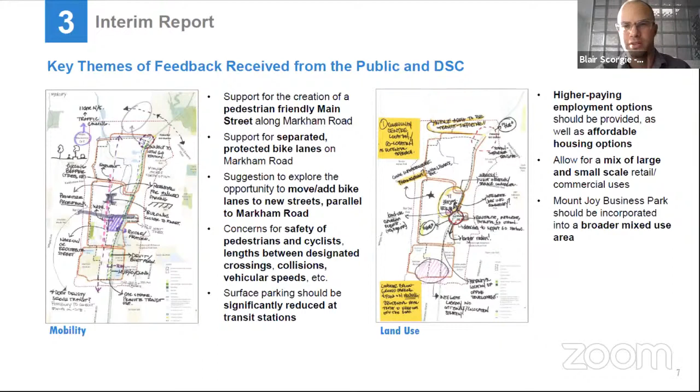You can see the images here of that. Those themes are transportation and mobility, Mount Joy Creek, parks and open spaces, the environment, infrastructure, community services, employment, retail, housing, and finally placemaking. This is just a summation of some of the other material.

So with that, I will hand it over to Lily quickly, who's going to take us through a fly-through demonstration of the plan.

Good evening, everyone. Blair, could you just stop sharing so I can... thank you. Give me one moment to get set up here.

Okay, thank you, Blair. Good evening, everyone. I am pleased on behalf of the staff and consultant teams to present a fly-through of the 3D model of the draft demonstration plan for the Markham Road Mount Joy secondary plan area. The 3D model was prepared using InfraWorks software and is intended to help visualize the draft demonstration plan, which contemplates the secondary plan area at build-out.

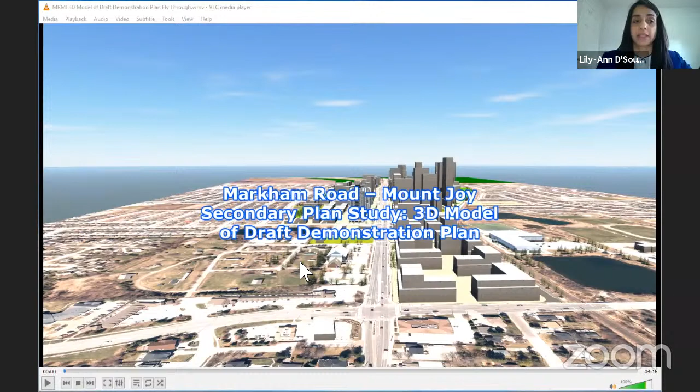As a reminder, the draft demonstration plan is a work in progress and will be refined by staff and the consultant team following consultations with stakeholders and the public, as well as transportation and municipal servicing modeling that will be undertaken in later phases of the study. Okay, so let's begin.

We start at 16th Avenue and Markham Road at the southern limit of the secondary plan area. From here, we are traveling north over the Markham Road corridor toward Major Mackenzie Drive East.

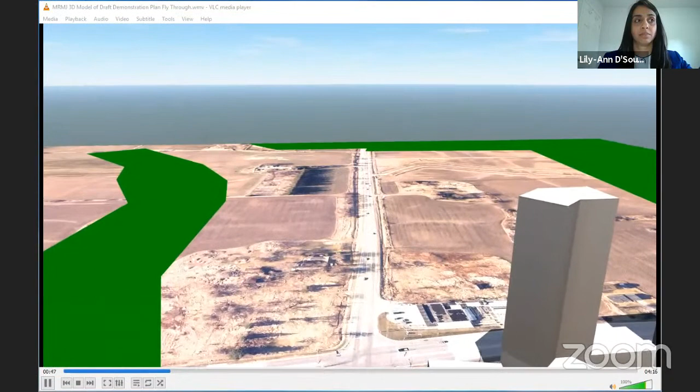Turning around, we now have a bird's eye view of the secondary plan area looking south from Major Mackenzie Drive East.

We're just going to pause here for a moment. From this vantage point, just east of the Stouffville GO railway corridor, which is right here, we can see the general location of the potential GO station recommended north of Major Mackenzie Drive East.

We are now moving south along the Stouffville GO railway corridor, which is the eastern limit of the secondary plan area.

A continuous multi-use pathway, which is this line here, is proposed from Major Mackenzie Drive East all the way south to 16th Avenue within the 30-meter buffer of the railway corridor.

The blue arrow represents one of two pedestrian crossings, either a bridge or a tunnel, recommended to improve east-west connections over or under the railway corridor.

So on our way south, we'll pause briefly again at Bur Oak Avenue looking west. In the foreground, you'll see the Mount Joy GO station lands, which include the parking lot on the east side of the railway corridor.

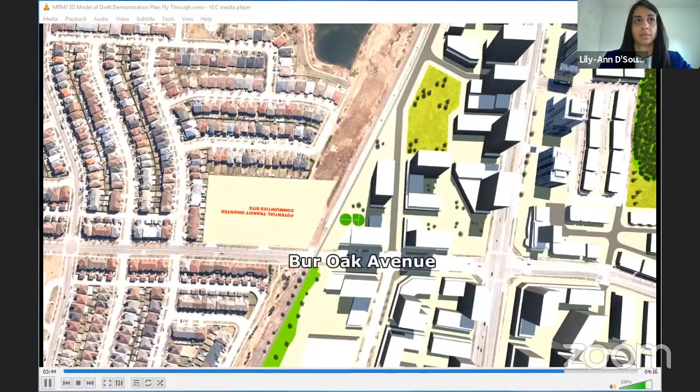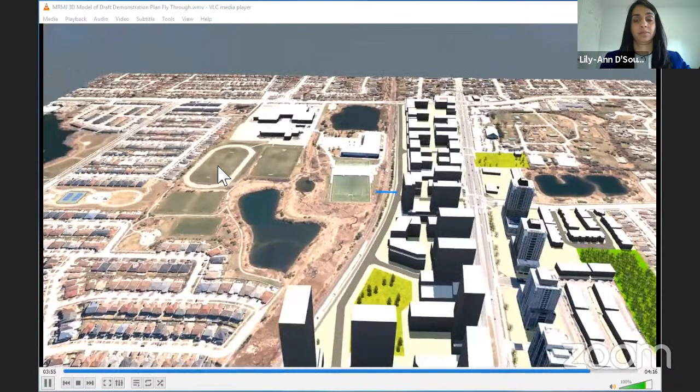From here, we will travel south along Markham Road back to 16th Avenue, where the fly-through will conclude.

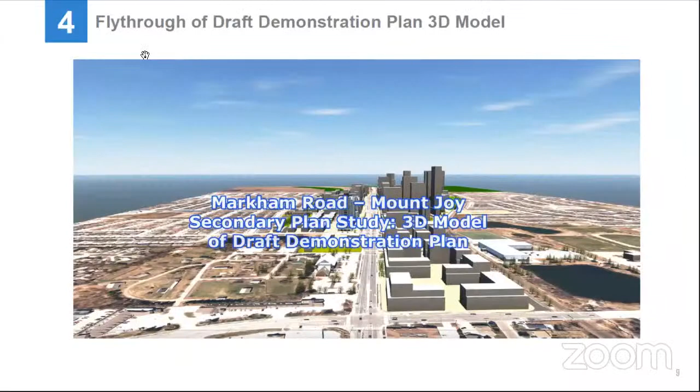Okay, so the draft demonstration plan forms the basis of the policy directions and the recommendations that are intended to inform the preparation of the secondary plan. The plan is intended to be in keeping with and augments the vision and the guiding principles, which have previously been developed. It's been informed by the findings of the baseline conditions assessment and the consultation and engagement findings to date.

It's emerged out of an iterative review and evaluation process, is based on a set of land use and built form assumptions, and introduces a set of preliminary development yields, which are still subject to revision. Finally, it's built on a set of framework elements, which I'm going to quickly describe in the following slides.

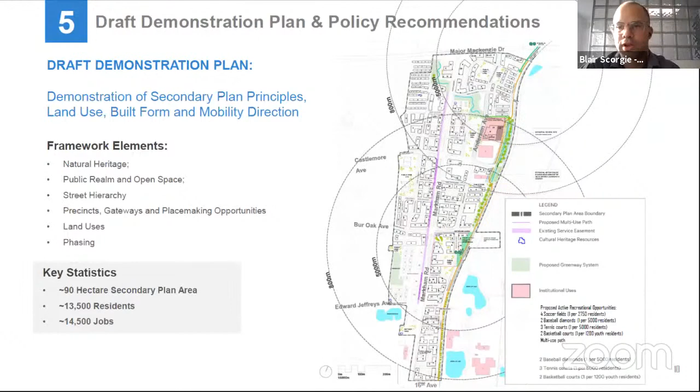So the first thing that we're going to look at here is natural heritage. The draft demonstration plan incorporates a connected natural heritage system, which is based on the recommended alignment and configuration of Mount Joy Creek, which Lily just showed in the 3D demonstration.

The lands designated as Greenway will occupy an area of approximately 5.8 hectares within the secondary plan area, following the alignment of Mount Joy Creek and its associated valley corridor.

In addition to the existing daylit channel west of Anderson Avenue, as you would have just seen, this is envisioned to traverse east of Anderson Avenue in a piped configuration before turning southward and continuing adjacent to the Stouffville GO rail corridor in a daylit channel.

Other retained natural heritage features include the existing Hammersley woodland, which is located further to the south between Edward Jeffreys and Bur Oak.

So as I described on the previous slide, the preferred alignment and configuration for Mount Joy Creek is constructible. It conveys the regional flood event, and it benefits from existing grading conditions along the Stouffville rail corridor right of way. This allows for a deeper channel design and improved habitat restoration potential, while providing for the best net ecological gains in relation to the other options explored, as well as the existing condition.

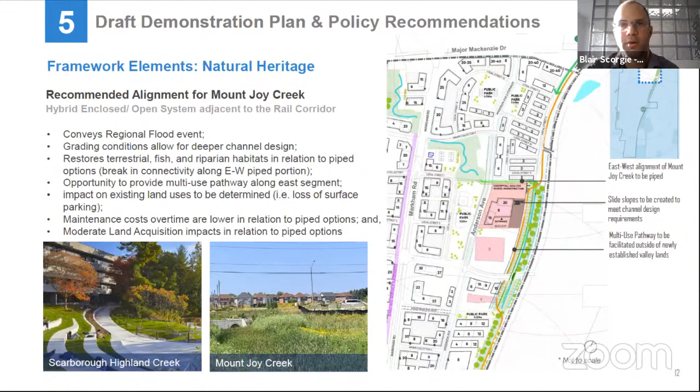So here are the other four options which were considered in arriving at the preferred alignment. The first option we looked at was an enclosed system along the proposed and existing Anderson Avenue alignment, looking at the existing component of Anderson and then the southern extension of it. The second was an open channel adjacent to the proposed and existing Anderson Avenue alignment. The third was an open channel which ran adjacent to the rail corridor. And the fourth was a pipe system which ran along the rail corridor. So what we've really arrived at is a bit of a hybrid solution.

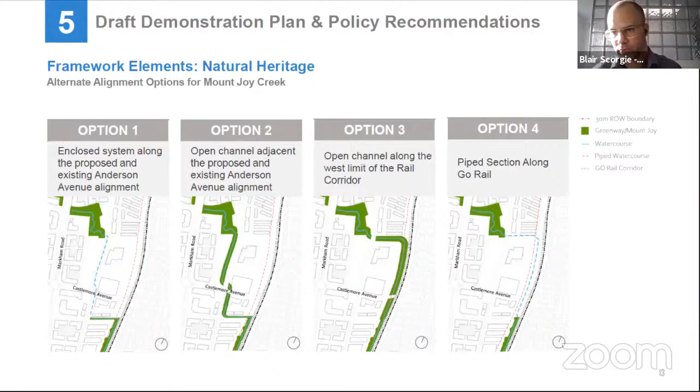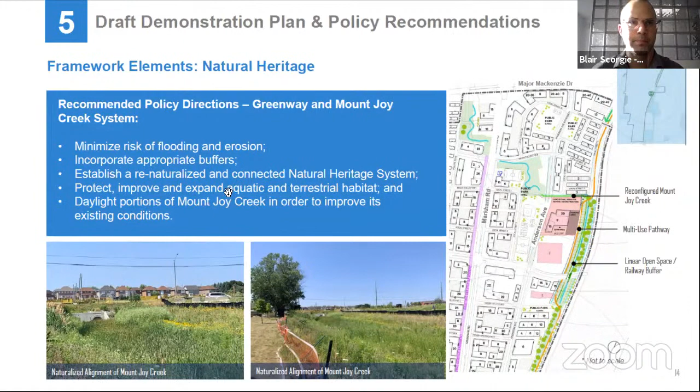So this is what we've heard to date. The hope is that through tonight's discussion, we want to know if we got it right, whether we're missing anything, or whether there's anything else we need to consider further, as Darryl mentioned earlier. So we value your feedback, and with that, I will hand it over to Shonda, who is quickly going to take us through a discussion focused on natural heritage.

Thanks, Blair. Good evening, everyone. It's great to be back at this juncture in the process here. At this point in time, we'd like to hear from you about the natural heritage section that Blair just provided an overview of, including the policy directions and recommendations there.

Specifically, I wondered if you could go to the bottom of your screen, you'll see a reactions button where there's a raise hand feature. If you have any thoughts about how we've treated natural heritage features and these assets that exist through our site, how we're looking to further bolster and increase them through our draft demonstration plan, including the Mount Joy Creek and the woodlot, we'd like to know your thoughts. Do you like how we've conveyed and illustrated that? Do you think we've hit the right policy directions to protect that space into the future? Or if there are other thoughts you have on that front, please let us know. Darryl will be looking out for any raised hands as they come along.

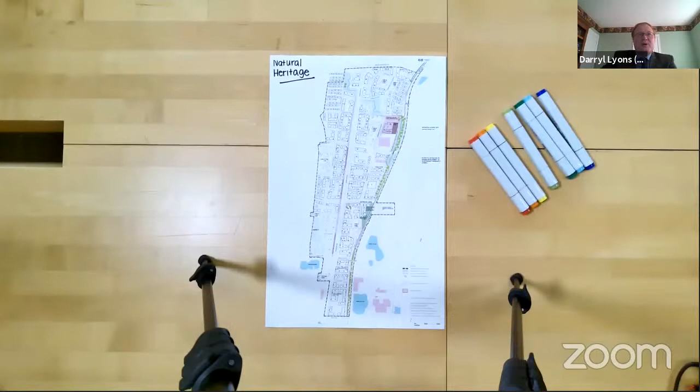Maybe just as we're giving this a minute or so for people to sort out that function, you'll see that the screen's changed a little bit and we have a map of the demonstration plan. Kim is working with Blair and I in the background here, and she's got a camera on that. Along the way here for natural heritage, but for some of the other themes, if there are any thoughts or comments, we'll certainly be taking note of that and making sure we capture the feedback we received tonight.

Carol, I don't know if I'm looking in the wrong spot, but when I go to reactions, it's I either have to clap, thumbs up, a heart, laughing out loud, shock, or party. And I don't know that any of those are the ones, but maybe it's somewhere else. But maybe just to start things off, you may have touched this on a previous occasion.

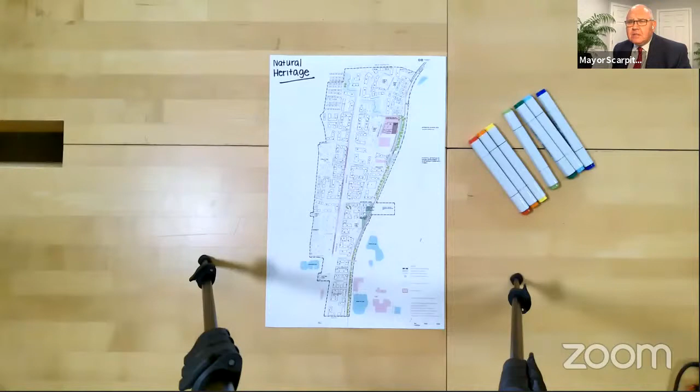Well, I think it's wonderful to have the open space and the linkages. Can you talk about what the plan speaks to, at least in terms of a trail through this area? Sure, maybe what I'll do is pass the mic to Blair to walk us through it. I think Lily gave a really nice overview in the 3D model, but we can certainly look at the map as well. And Kim, if I could ask a favor, if you could take a marker as a bit of a pointer, maybe you could visually point out the areas that Blair's speaking to.

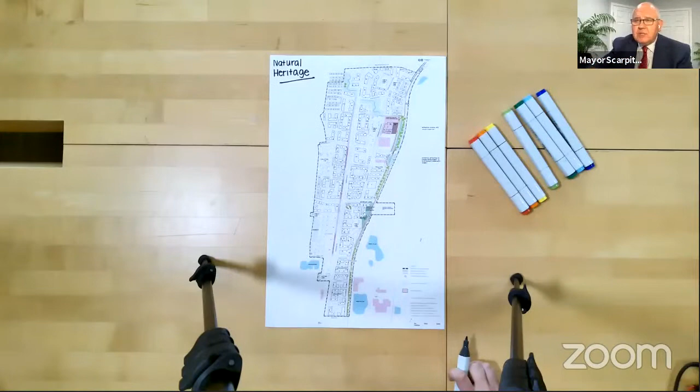Mr. Mayor, I just want to confirm my understanding: the question is we're looking to hone in on the precise alignment and location of the multi-use trail system. Is that correct, sir? That, and what portions of it relate specifically to the open space linkages here? The natural ones, okay.

So generally speaking, the multi-use trail is aligned alongside the west side of the Stouffville GO rail corridor. It traverses throughout the length of the study area, moving from south to north, along the eastern most boundary of the study area. You can see Kim is pointing to it right here. There's a point right where Kim's pen is now, just near the school site.

This is the location within which we're looking at renaturalizing and reconfiguring Mount Joy Creek. There's a point at which the multi-use trail needs to actually cross that creek, the daylit portion, and move closer to the school site that we've shown there, a bit further away from the rail corridor. That's where it begins to interface with the natural heritage system a little bit more. As you continue moving further south, closer to Castlemore Avenue and southward beyond it, there's a bit of an open space buffer between the trail itself and the rail corridor.

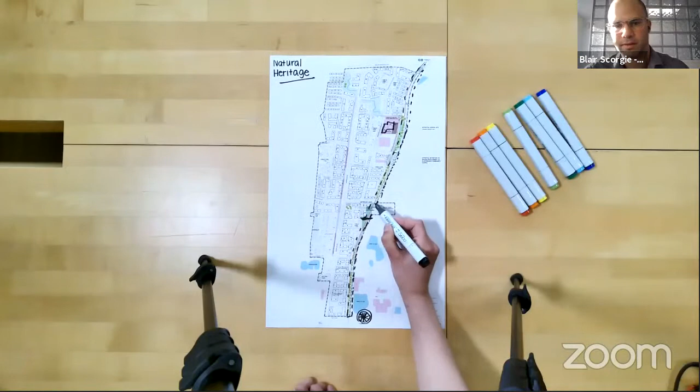I hope that answers your question. There's also a park interface between the multi-use trail and just south of Mountjoy GO Station. Once it leaves the transit plaza, it comes across the edge of a proposed park right there, about where Kim's pen is now.

Darryl, or sorry, Blair, I was going to ask Darryl, but Blair, what we see in the green here, is that what's remaining as the natural open space within the plan? Because it doesn't seem to quite match the previous one we saw. I don't know where we saw it. I think it was perhaps part of the 3D, but there was a map you had that showed there might be some other parts of it that are open and green.

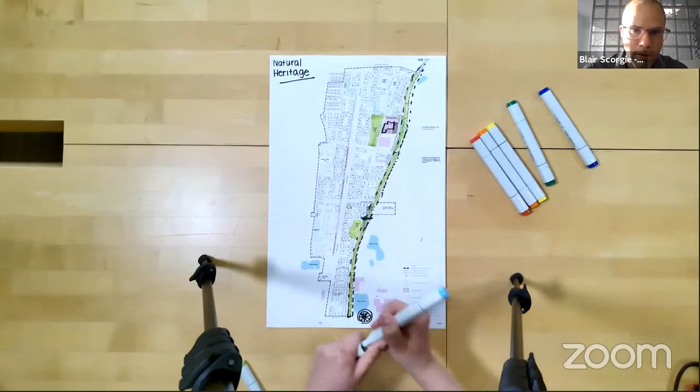So the lands immediately east of the school site are a landscape buffer running along the length of the rail corridor. Those are all green space. The existing Mount Joy Creek configuration west of Anderson Avenue is to remain, and in addition, we're proposing a new public park immediately west of the school site. Kim is highlighting that right now. And of course, the existing daylit portion of Mount Joy Creek is just immediately north of that. So these are the major interfaces with the parks, open space, and natural heritage system.

In that area right now that was just drawn in, is there any connection from a trail system or pathway system through there up to Major Mackenzie? Sorry, it's been a long day. Totally fine, sir.

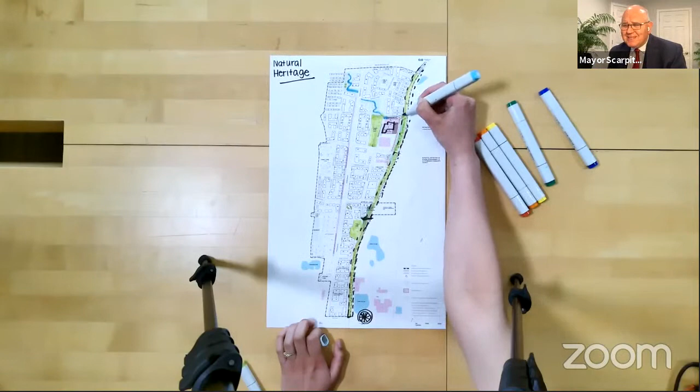It's certainly something that we can look at. What we're currently looking at, correct me if I'm mistaken, Darryl, is a street connection, an east-west street connection there adjacent to the piped portion of Mount Joy Creek, to service the school. But certainly that's something we could look into. I think part of the reason we're here tonight is to seek feedback and input in terms of what types of uses we would like to see on the periphery of that natural heritage system.

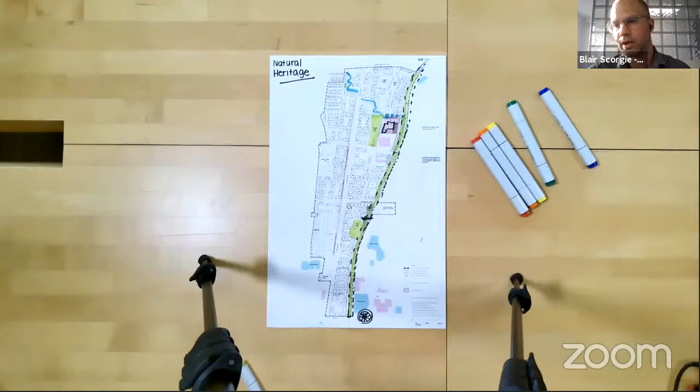At Mount Joy Creek, we haven't programmed them, so to speak, or determined anything definitively. But certainly things like trails along the periphery of the creek system are on the table and worth consideration. So I appreciate that.

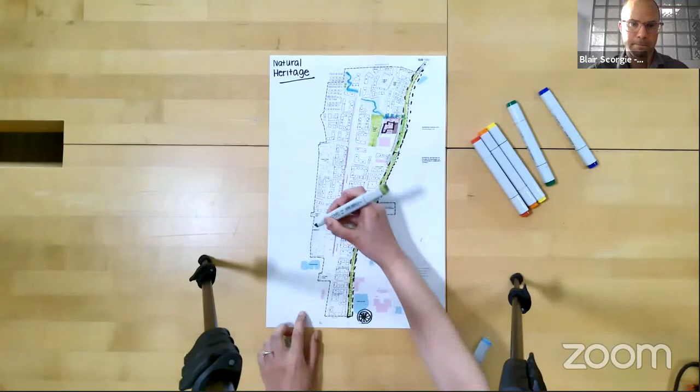That's a really good question, Mr. Mayor, about the connection along that piped area east-west, just on the north side of the school site, and whether that's an area where we haven't figured out the exact programming and what that linkage would be. But that's a really good comment, because what we really want to do is create not only a transit-oriented community, but an active pedestrian-oriented transportation network.

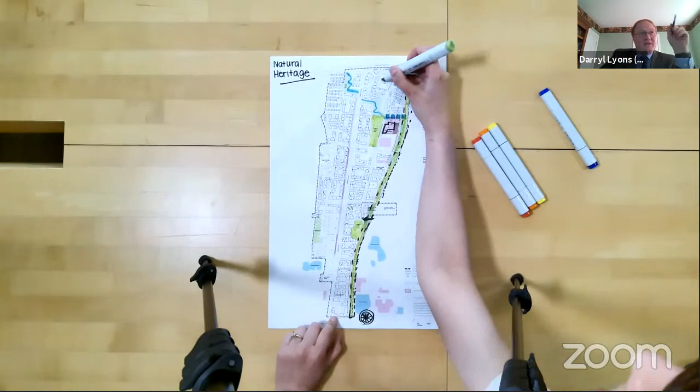So where Kim had put in the dots in blue just on the north side of the school, you'll also have Anderson going north right up to Major Mackenzie, and right in the development south of Major Mackenzie, there are two park spaces on either side. So there is a bit of a connection. We're really trying to create a spine that goes all the way north-south, and then look for any opportunity to connect east-west, to connect Wismer and Greensborough as well.

Okay. I see that we have Rosemarie Humphreys has a question.

Good evening, everyone. Hi, Darryl. Yes, good evening. I represent Krashnik Investments, which is the owner of the properties at 9833 and 9827 Markham Road.

And you've got it colored up there really well. Tonight you're showing the school site, the open water course, a multi-use trail, and a large park on the property. So I'll limit my questions right now to the natural heritage aspect of this, but I did notice when you have this up on the screen, that the width of the corridor running north-south alongside the rail line seems to change.

As you go from north to south, it seems to be quite a bit narrower at the south end of the plan, and then kind of widens out by the Mountjoy GO station area, and then narrows in again north of the school block. Could you explain why that is the case?

Okay, so I will start, and then I'll see if Shonda and Blair can add to this as well. But generally within the demonstration plan, all along that area on the west side of the rail track, we're trying to stay within the 30 meter buffer that sits on either side of rail tracks, where you're not allowed to have buildings and structures. So in some instances there's parking, but no built structures. We're trying to fit within that, and that may just be a bit of an oversight in the draft demonstration plan, but generally it's fitting itself within that 30 meter buffer, and it should be fitting along all of the way down.

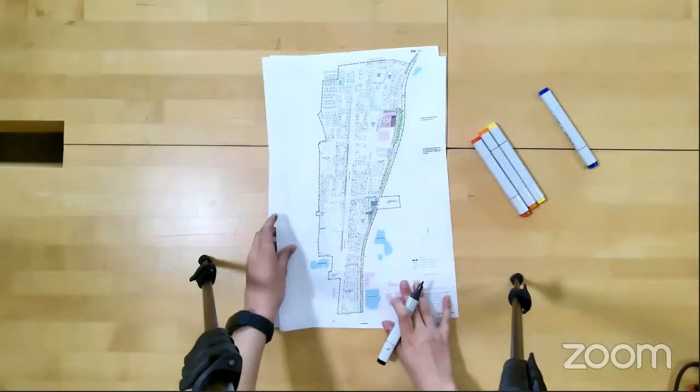Okay, because on your plan here, it looks wider towards the north end of the plan. Yeah, even on here, what she just put up on the screen, it seems to be wider up by the Krashnik Park property area, and then more narrow as you go south again. So there seems to be some issue with that.

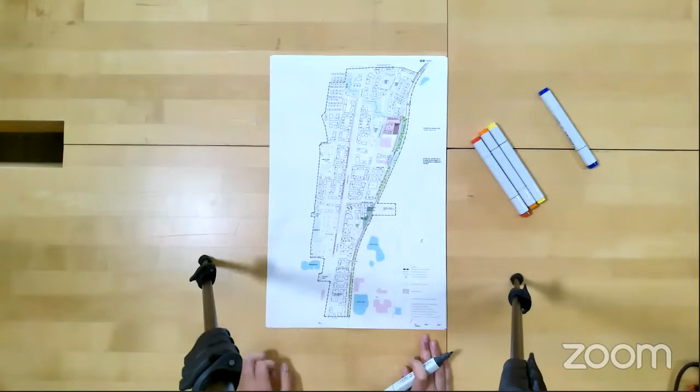The other thing, Darryl, I wanted to clarify with you or your staff is you indicated that you can't put any buildings within the 30 meter buffer. I'm going to raise that question with you, and we will have more correspondence as the process goes on, but I think you are allowed to put buildings within the 30 meter buffer, provided that you have the appropriate noise and safety mitigation. So I don't think you should be treating the buffer as a no-build zone per se.

So I would actually ask, we have a representative from HDR that has been providing information regarding this. Would you be able to weigh in on this, please?

Hi Darryl, Jonathan Chai from HDR here. I am the transportation planning expert on the team.

We have been getting input from our rail team as well on this. The direction I've been told is that we should be planning for that 30-meter setback as a starting point. I think there could be further discussions with railway managers that could be had, so that's something we can explore further if there's a desire.

Okay, thank you for that. Yes, Rosemary, we can look into that further, and I look forward to having further conversations with you. Thank you.

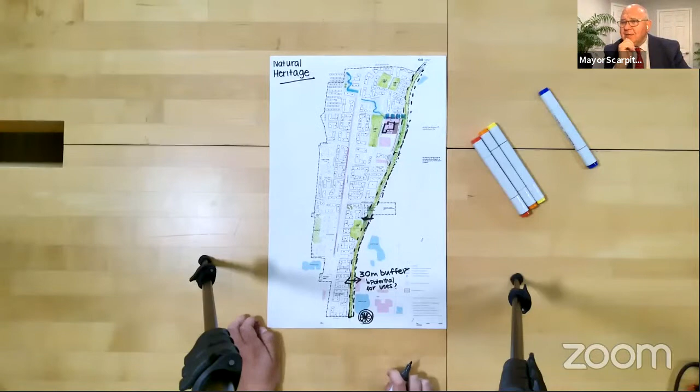Darryl, I'm not sure if it's a silly question, but Metrolinx is looking at electrification down the road, and I've heard some stories on what will happen. Will that have an effect on having a trail system right next to it? Do they build brick walls? Is it tons and tons of hydro lines? What happens when it's electrified?

So with that, I'd like to ask Jonathan to weigh in, as well as our transportation staff.

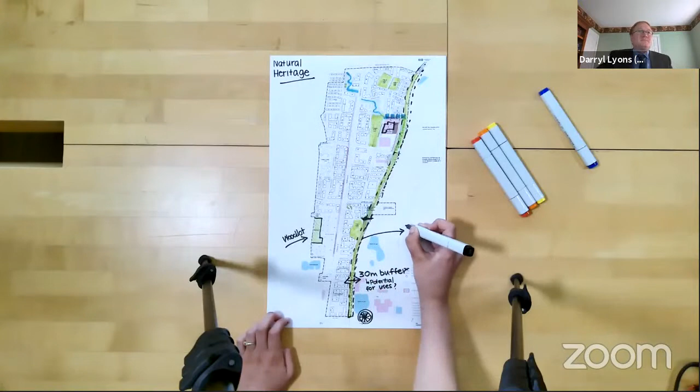Darryl, as part of our prep for this work, we did review Metrolinx's Stouffville GO Corridor environmental assessment for the RER program. It does identify some infrastructure along the corridor, including additional track in the southern end of the study corridor. Generally speaking, a lot of the improvements would be within that 30-meter buffer, so those are the kinds of considerations that are important when we're considering the infrastructure needed in that 30-meter buffer.

So if GO wants to expand within that 30-meter buffer, that could depend on whether they wanted to use a couple of meters or a lot of it. That could impact that significantly.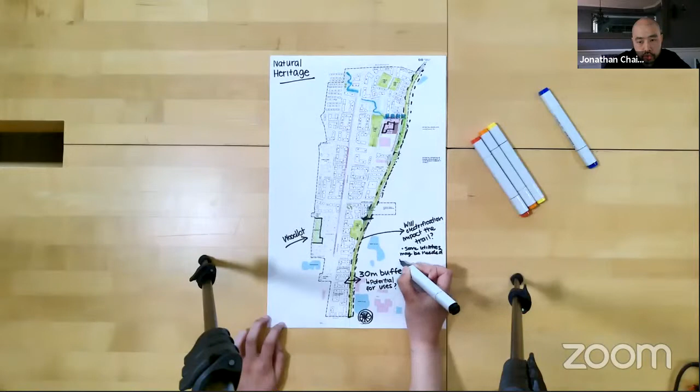To some degree, that 30-meter buffer is there for the railway corridor authority to plan for any improvements or to protect for any improvements needed to support their operations. So that's why it's there. But through further discussions, there may be opportunities to put things in there if necessary.

Okay, and I got a text from a resident, and I might have missed it. Are we looking at piping the river and creek and burying it? Is that her understanding?

So in the proposal, Councillor, if you go back to Markham Road, just on the east side of Markham Road, where you can see the creek coming down along there, that is all open channel. Then, as you can see, those dashed lines, the proposal is to pipe that piece going east.

And that's to accommodate proposed development and other applications. Then it is proposed to be open channel all the way south from that point, so it's just the one section. Correct, it's actually improving the natural condition from where it currently is, where we have a larger pipe solution currently in existence.

Okay, so that's open channel, but that's also where the 30-meter buffer is, and that's also where the trail system is supposed to be. Am I understanding that correctly?

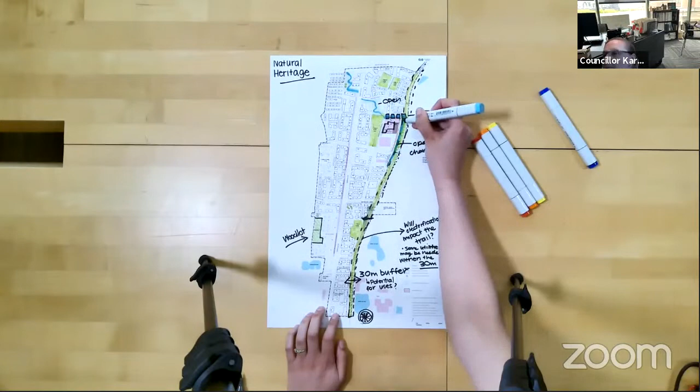Correct. The whole point of this is to create a nicer natural environment, as well as having active transportation options to allow people along that spine to walk north, south, connect with the Mount Joy GO station, connect north up to the potential Major Mac GO station, and then also have east-westerly connections to get into the adjacent community, as well as onto the east side to get into the Mount Joy Community Center.

So we need to make sure that there are enough open spaces, especially during COVID. It's taught us that we need more open spaces. People are walking the streets everywhere. There has to be more trails, more connections, and more space for people to move around in.

Thank you. Thank you.

Okay, I see we have Jackie. You have a question?

Yes, I do. I have a couple of questions, piggybacking on Karen's comment about the east side, looking at the east side of Markham Road. Probably I missed it in the 3D presentation, but the green space will be important on that side as well. If we're building this community, the first couple of sessions talked about a live, work, and shop format for it.

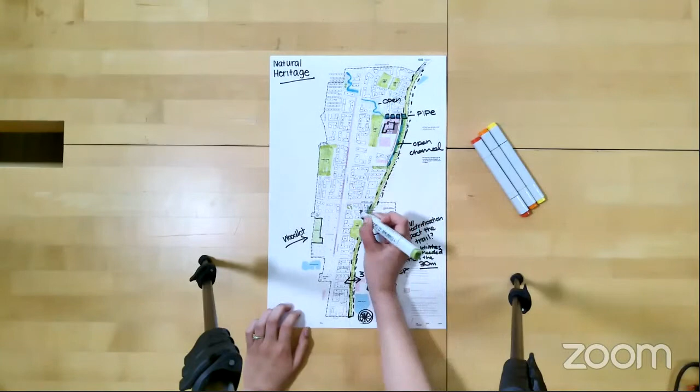I'm getting a little concerned because I'm seeing a lot of large buildings like condos. I guess through this meeting tonight we're going to have a clearer identification of those green spaces on the east side. I agree the woodlot being able to move through it would be nice, but we need green spaces on both sides. I'm also trying to find where the shopping is going to be. Currently there's lots of shopping available, and particularly if you're going to have high density north of 16th Avenue, we're going to have to provide for that.

So obviously this is only at the beginning of the presentation tonight, so hopefully those concerns will be clarified. Yes, and those are excellent questions and comments, Jackie.

We are actually going to be going through functional themes, and we'll get to one specifically around land use, looking at where the retail is, where the mixed use is, and where the concentration of the different areas are. We'll put up another map like this one but dealing with the actual land use, and that's where we can have some really good conversation about those exact issues. And I just want to again highlight, as Karen did, that the woodlot and any green space would be important. Thank you, perfect, thank you.

I see we have, first of all, I'd like to acknowledge that Regional Councillor Joe Lee has joined the meeting tonight as well. I would also now like to ask Regional Councillor Jones, I see you have your hand up.

Yes, the 30 meters, is that 30 meters on either side of the track? Jonathan from HDR, is it 30 on either side? I believe it is, yes Daryl, that is my understanding. 30 meters on either side. And what do we have there, one track or two tracks?

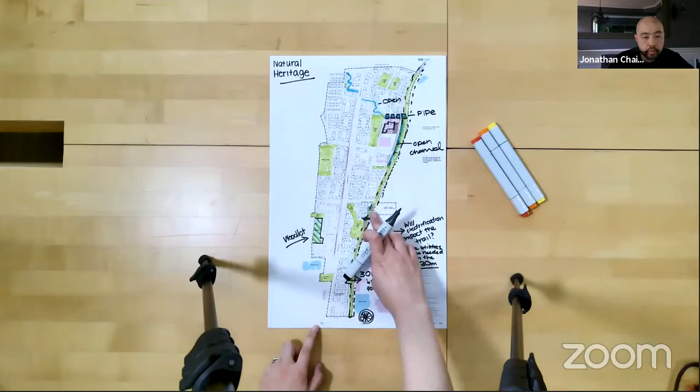The map you got up there, the outline, how many acres is that? Sorry Regional Councillor Jones, could you please repeat that? The outline of the map, okay. It'd be nice if they could really enlarge it because I can't read a damn thing on it, okay?

You know, you've got some table you're on, and the table is 80 to 85% table and 15% picture. That'd be nice if you could enlarge it so we could read what's on there. But what I'm saying is the outline of that corridor study, the outline you have there, how many acres is it?

Shonda or Blair, did you want to start this one please? Just to clarify, the question is how large is the study area for the secondary plan? Well, the map you got there, how many acres is it? Major Mac to 16th, yeah, I guess it's the railroad tracks on the east and whatever is on the west. How many? I'd have to do a bit of a conversion, but it's about 90 hectares of land, I believe. Is that about correct? 250. Yeah, 240 or something, 235.

And in the 3D modeling that you showed there, how many square feet of retail, how many square feet of office, and how many residential units? Blair? I can look at this, but I need to pull up the yields, I don't have them in front of me. It may take a minute or two. I'm not sure if anyone has them.

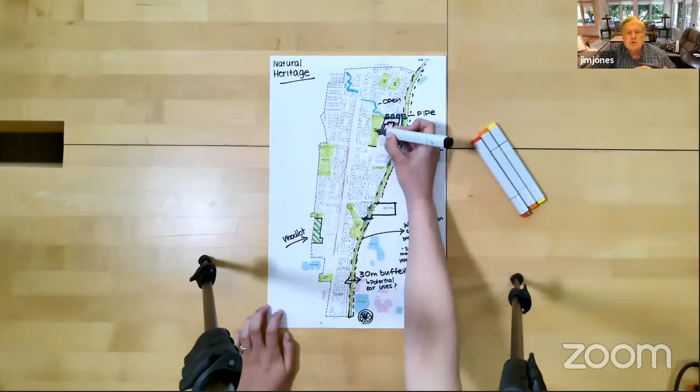It's on the west side of Anderson. But do you know how many acres is the school and the school lands around it? How many acres are they taking? What's the footprint of the school? Not the building, just the whole parcel. So the parcel of the school, as I said, is 3.2 — the park site on the west side.

Could I ask somebody that has the demonstration plan up outside of this view? Because I know the size is actually listed right on it. It's slide 33, Blair. I know we're jumping quite a bit ahead, but the school, I'll just tell you, it's a 4-acre school site, and that's planned to be vertically integrated with a private development next to about a 1.5 to 2 hectare public park, so that's across the corridor.

4-acre school site, including building, correct? Yeah, that's right. It's assuming a vertically stacked, I believe, 3-story school. Is that your understanding? Okay, that's all for a while.

It'd be nice if you could make your picture bigger. Yes, we've passed that on. What we're going to try and do between the next few slides is see if we can get the camera to zoom in a little closer for everybody. I know I've been squinting my eyes a bit, so we'll get to that.

But otherwise, I do see we have one other question. Gabe, do you have a question or comment? Good evening, everybody. Can you see me and hear me? Definitely, good evening. Good evening, Daryl, good to see you again. Good evening, Mayor Scarpitti and members of the committee and the city's consultant team.

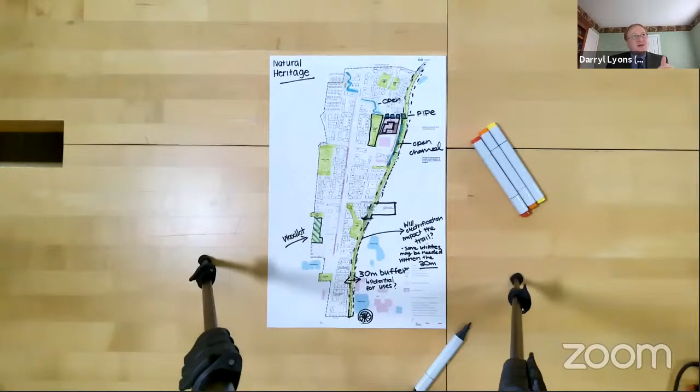Actually, we have some slides going further into the deck to talk about that a little further. As we get there, you'll see some of the conversations, because we're looking at design, we're looking at some imagery, we're looking at ideas, but we haven't gotten into the very detailed elements of whether it's a little bit further north or a little bit further south yet. So if you have ideas or suggestions about where you think those linkages would make sense, we'd really love to hear that.

Yeah, if I may, we'll continue to follow up through the process, but just as we look at our emerging development plans and our revisions with the acquisition of the southerly property that would affect the extension of Edward Jeffreys, we just thought it might make sense to perfectly align, kind of as a grand alley that guides you to the walkover, so that somebody on Markham Road who may not know in the fullness of time that the pedestrian crossover is there, would have it right at the extension of, or the intersection of, the Edward Jeffreys extension and that new north-south road. That might be a logical point. Having said that, we don't know what the requirements are for Metrolinx and the city on the park side and the landing side. There's a soccer pitch right there, so we were just curious about the level of conversation with Metrolinx. And you're right, Darryl, with the twinning of the track, the span is going to get a lot bigger. So I guess we'll find out more information as we go further along with the study.

I appreciate the answers and the ability to comment. Thank you. Perfect, so I think we've gone through the questions at this point. So Blair, back to you to continue through the presentation. Oh sorry, I apologize, Regional Councillor Jones.

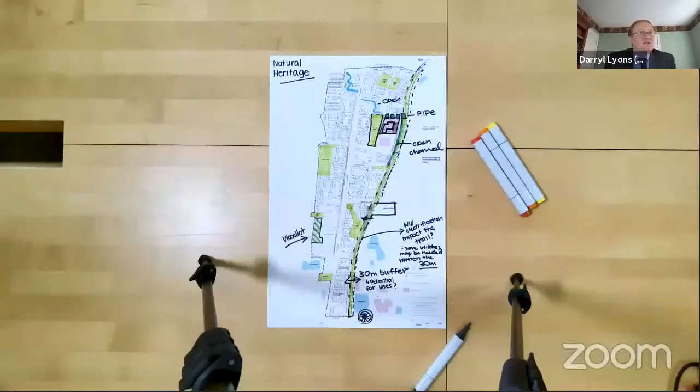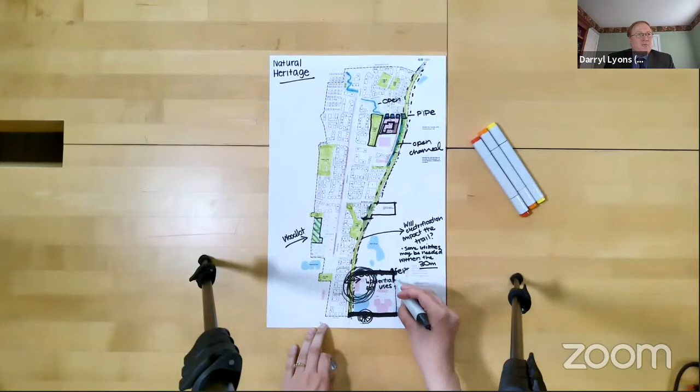Yes, Darryl, where is the community center and where is the library? Or does this site even generate a community center and a library? This site does not generate a community center. The community center, the Mount Joy Community Center, is just on this map - you can see, right there. Well, kind of in that area. It's actually southeast of that piece. Yes, so that's the Mount Joy Community Center. There is not a generation for one, as we've been talking with our operations people, around having a library. We do know the integrated leisure master plan does speak to having a library located somewhere in East Markham, but that site has not been confirmed at this point.

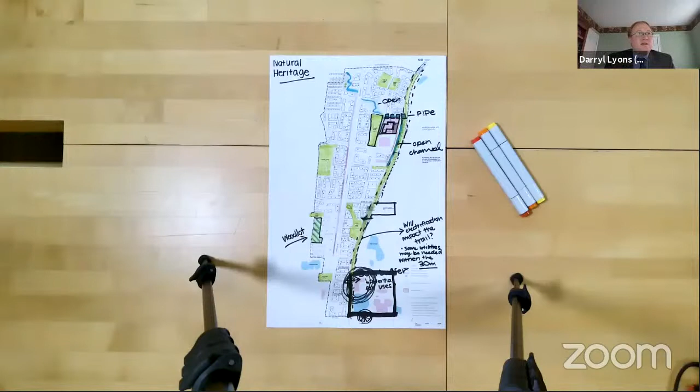And Darryl, I asked a question, I still don't get the answer. How much retail, how much office, and how much residential is in this plan? You must know. Okay, I'm not sure, Blair, have you had a chance to pull up some of that information? As we mentioned back in December, as well as in our recent visit to Development Services Committee, we are still looking through the specific elements and the right mix. This current draft demonstration plan has quite a bit of mixed use, so we're actually going back to the drawing board a little bit in order to reduce the amount of mixed use, because realistically the office is going to be mainly functionally located on that Mount Joy GO Station site. So within that, that is where the core element of our jobs are. Realistically we're looking at approximately 8,000 to 9,000 jobs and about 18,000 population for this entire secondary plan. It's going to be somewhere around that range, but we're continuing to refine and look at this area in more detail. As we mentioned back in December, I think it was a question from you about the linkages with FSI, so that's some of the work we've been doing to ground truth this a little bit further.

Just refresh me, the Mount Joy Community Center, what is there? I know there's one arena, and what else is there? I haven't been there in a long time. As I recall, one arena and one indoor soccer pitch. Because what we should be trying to do is, you know, where the Metrolinx thing is on the east side of the track, we should be incorporating that as a community center located around the train station.

Oh, that's a good idea. As we indicated, we'll have to look into that. We'd only shown it as an outline—it was a recent addition when we were having conversations about TOC development, trying to figure out the amount of development needed for a private developer or someone else to redevelop that site. It's relatively new for us, trying to think what to do with that flat parking lot. Happy to hear that idea, we can look at that. We'll also want to see how it fits with the rest of the site, since Mount Joy isn't really the center of focus on the plan for 20,000 people. But anyway, you'll look at it, that's all I'm asking. No, we will. Thank you.

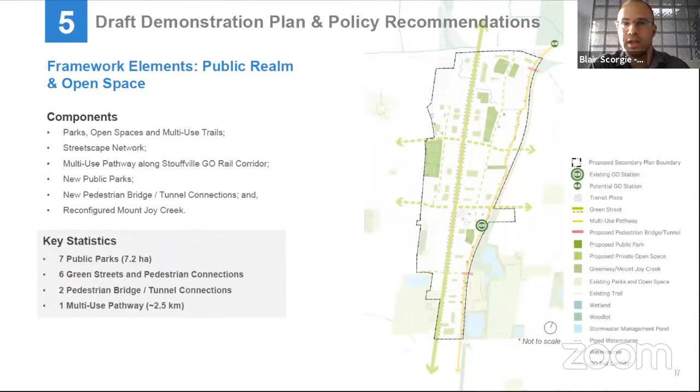So for ease of reference and consideration in advance of the next poll and discussion, this slide quickly summarizes key policy directions with respect to parks, open spaces, and multi-use pathways.

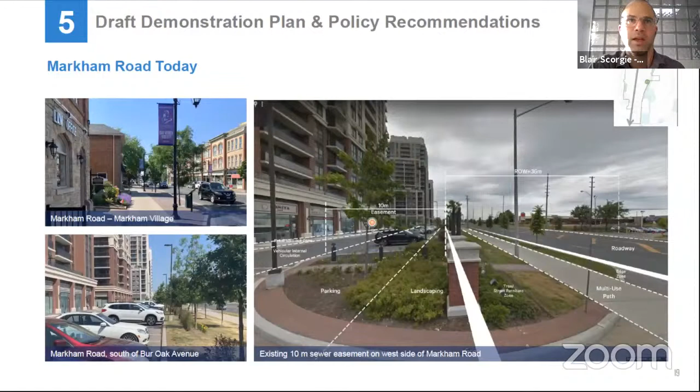Markham Road is anticipated to transform into a vibrant mixed-use Main Street. Its detailed redesign and redevelopment between Major Mackenzie Drive East to the north and 16th Avenue to the south will be subject to a municipal class environmental assessment process. Implementation of improvements along Markham Road will be achieved through development charges or capital investments, some combination of the two, although streetscape improvements could also be realized on a site-specific basis through the phasing of private land developments.

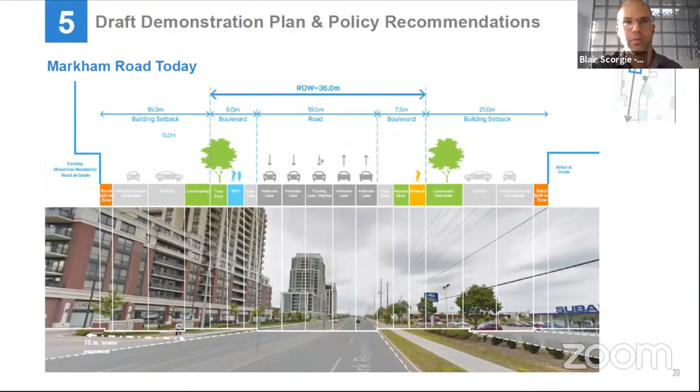The previous slide showed a view of Markham Road adjacent to the easement as it exists today. Here we're layering a simple cross section on top of an image of the roadway, so you can get a sense of the location, sizing, and various elements that comprise that right-of-way and streetscape. This is an existing cross section of a typical section of Markham Road.

Markham Road is anticipated to maintain generally a minimum 36-meter right-of-way width between Major Mackenzie Drive East and Edward Jeffreys Drive. As it approaches 16th Avenue, the right-of-way is anticipated to taper slightly in order to establish a transition between the secondary plan area and the Markham Village area to the south.

Generally speaking, it's recommended that Markham Road include protected cycling infrastructure and facilities, sidewalks, landscaping and street furnishings, a central median and turning lane, and a maximum of 4 travel lanes, including 2 in each direction.

Adjacent to the public right-of-way, abutting developments are recommended to incorporate setbacks to accommodate flexible spillover spaces that could be used for outdoor retail sales or other transitional uses between the face of the building and the public right-of-way, while framing the street and establishing an appropriate sense of scale and enclosure. Where possible, properties along the west side of Markham Road should utilize the existing 10-meter easement that exists there for these purposes specifically.

Again, for ease of reference and in consideration of the discussion that's about to follow, this slide quickly summarizes some of the key policy directions we've established regarding the broader street network and Markham Road specifically.

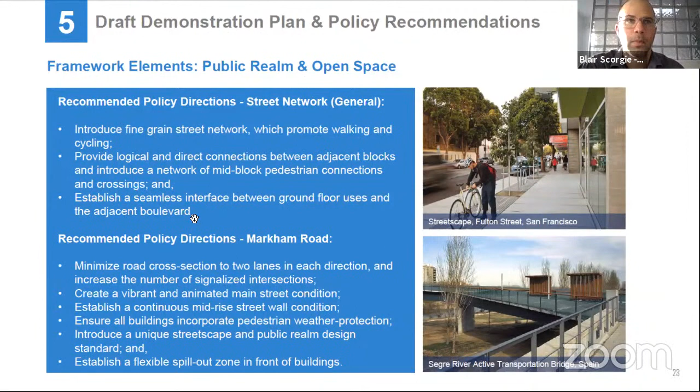This slide summarizes some key policy directions regarding green streets and pedestrian connections specifically. This is what we've heard to date. Through tonight's discussion, we're hoping to determine if we got this right. Have we missed anything? What else should we explore further? We're really hoping to get your feedback.

So with that, I will hand it back over to Shonda, who's going to lead a polling exercise and then open a discussion. Thanks, Shonda.

Blair, you have such a great ability to focus. I know that your hands are full with your daughter in the background there. So thanks so much for that.

Okay, we've got a few questions here now on this public realm and open space section. We'll start with a poll, and we're going to have available poll question number one, which is: should the number of lanes on Markham Road be reduced to encourage slower speeds and support the development of a main street?

We're getting some pretty quick answers here so far. Interesting. So an interesting split here. Lily, should we give it a bit more time? I guess we've got 30 more seconds or so, do we? We'll give it a few more seconds. Thank you.

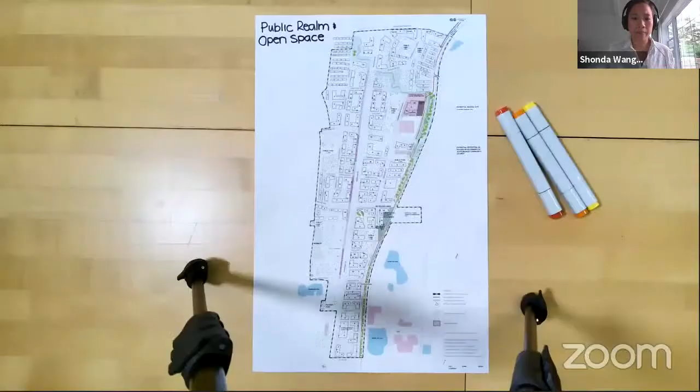Thank you. On the drawing for the cross section, right now you have that big median in the middle of Markham Road. I'm presuming that's going to come out? The existing median that's in Markham Road? Jonathan, could you take that question? Talk about what the redesign of Markham Road might mean for the medians.

Well, I think we haven't gotten there yet in terms of whether or not a median should come out. I think we first want to start with how we want to best allocate the space within the public right of way, and the previous exercise spoke to that exactly. I can probably say there will be a need for dedicated turning lanes, and often medians can help accommodate turning, like left turn lanes, for example, to provide safe access to adjacent roadways. But the design of the street is something we would consider later on, or as we detail out the recommendations of this study. So it's something we can consider, whether or not a median is there.

Okay, and I've brought this up before about my area, which is south of 16th. I'm working on a motion, if I can get 5 minutes of peace, to bring back the vision from Bullock Drive to 16th, and the residents want that taken down to one lane north and south. They do not want to maintain two north and southbound lanes. So I know you mentioned south of Bullock, it was one lane each way. The residents would probably prefer it to be one lane either way, south of 16th Avenue.

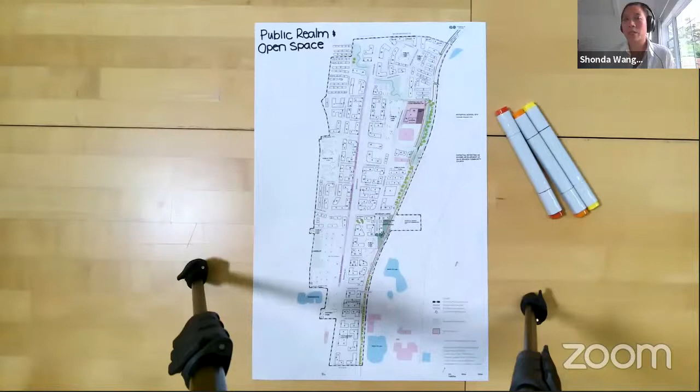If I could ask Blair to - I'm sorry for switching the screens here - but Blair, if you could go back to that cross section, I think that might help us look at how we allocated space within that right of way. Thanks, Blair.

Maybe Blair, you can share this when you have a moment. We do know that the right-of-way varies along the length of Markham Road. Here you're seeing where space has been shared between both the boulevard sections, meaning the sidewalk and the protected cycling and the planted components, as well as the roadway piece. Beyond that, further augmenting the boulevard with building setbacks for spill out space, either by retail or other commercial uses, etc. So happy to take your feedback on this.

It was interesting to note the various kinds of comments we were getting from at least this group here today, where we had a bit of a split about that one question we asked earlier about whether lanes should be reduced.

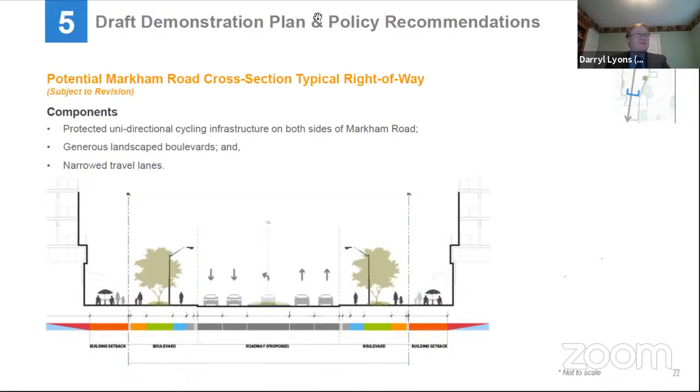So the next layer we're looking at is the street hierarchy. The draft demonstration plan incorporates what we feel is a fine-grained network of arterial, collector, and local streets that are intended to allow for the redirection of some vehicular movement away from Markham Road, to facilitate that transition of Markham Road into a vibrant mixed-use Main Street, and to slow vehicular movement along it as part of that process.

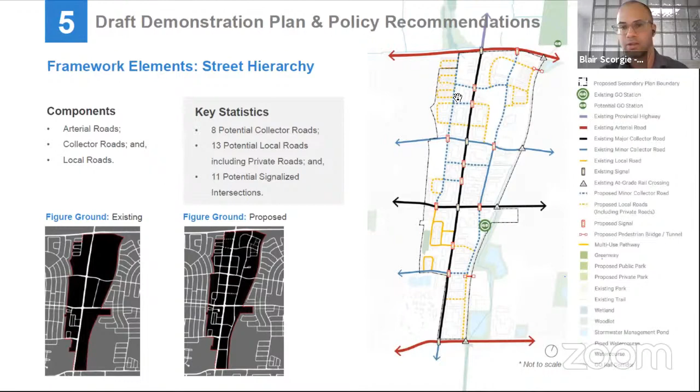The plan facilitates options for multimodal transportation as well as new frontages and site access. It also promotes logical and direct connections between adjacent blocks. Here's just some quick stats regarding the number of streets. In the map, the dashed lines represent the proposed street connections being added to the existing network.

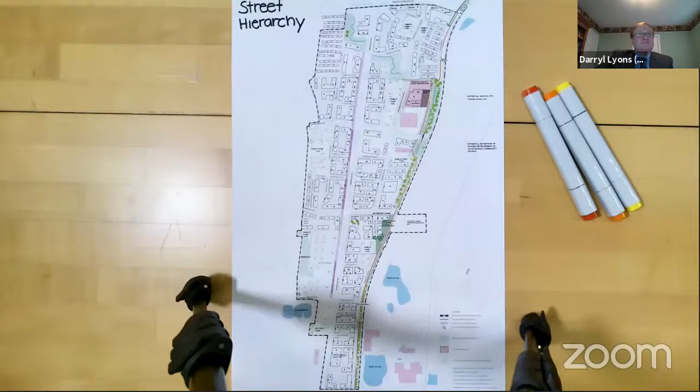Okay, so the next theme that we're going to look at is land use and built form. On this slide, you can see a map indicating with the legend items on the right-hand side the type of land use. This map is intended just to show the types of different land uses that we're considering and the geographic distribution of those land uses.

On the left-hand side, you can see a breakdown of those land uses with some preliminary densities. The FSI stands for floor space index, which is the ratio of development versus the amount of land on site, and the gross floor area of the types of uses that are anticipated. Again, these are preliminary yields and statistics, subject to further review and evaluation and subject to change. But this is generally what we're looking at.

In this map, you can also see what we've identified as primary employment frontages and primary retail frontages. So to elaborate, the draft demonstration plan concentrates primary height and density peaks around the existing and potential GO stations at Mount Joy and Major Mackenzie Drive East, before transitioning downward along the length of Markham Road, and again downwards towards adjacent and surrounding parts of the secondary plan, as well as adjacent neighborhoods and districts. Building heights surrounding the potential Major Mackenzie GO station specifically will be commensurate with and dependent upon the integration of a new GO station in that location.

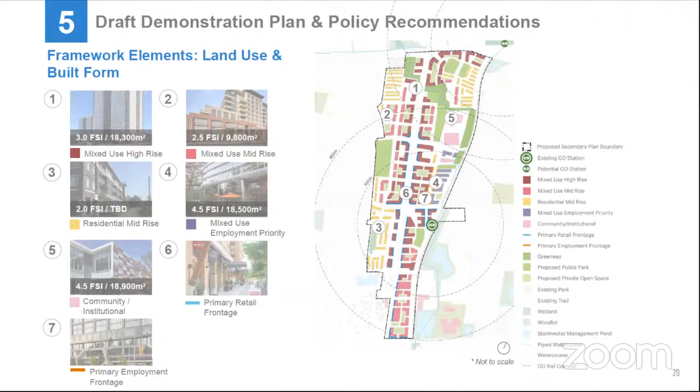Yeah, I just feel like it would be a lot of concrete. Okay, well, thank you for that. As I said, we're looking for that type of feedback, so we'll take that back. And if you have additional comments or feedback, please weigh in through the Your Voice Markham platform. You'll have our email addresses at the end of this presentation as well.

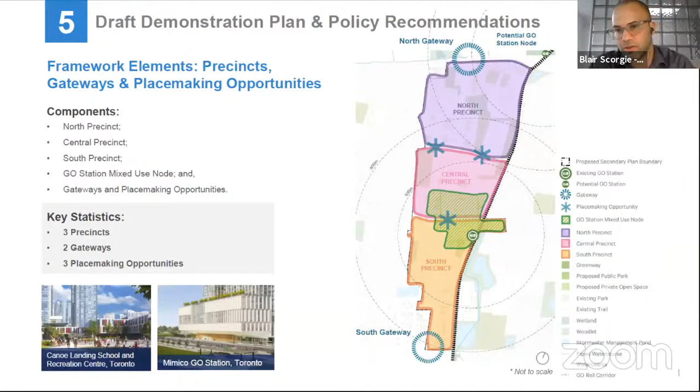That is the Mount Joy community. It also incorporates two gateways, which bookend the northern and southern extents of the secondary plan area. You can see Major Mackenzie Drive East at the top end of the map, and 16th Avenue on the south. These represent significant opportunities for landmark developments, open space treatments, public art, and wayfinding.

Finally, it also identifies a few supplementary placemaking opportunities at major intersections, as you can see in the asterisks. Here, for ease of reference and consideration in advance of an upcoming poll and discussion, this slide is intended to quickly summarize some of the key policy directions we've established with respect to gateways and placemaking opportunities.

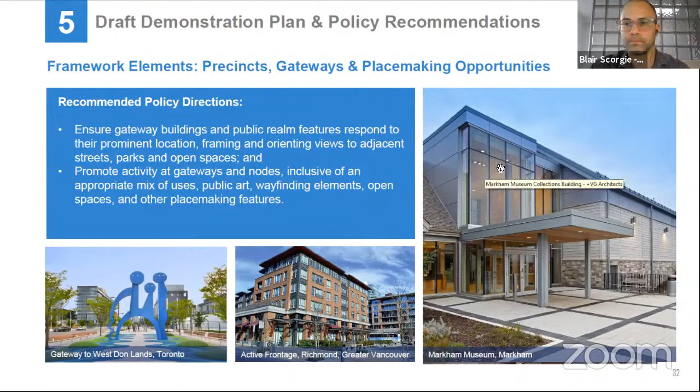Just to dive into the details a little bit, the North Precinct is anticipated to include a direct connection to the potential GO station site at Major Mackenzie Drive East, as well as the realigned and reconfigured Greenway and Mount Joy Creek system, and a pedestrian bridge or tunnel, as described earlier, and a new school site with the potential to integrate with a larger mixed-use development.

Again, the specific siting of the pedestrian bridge or tunnel will be subject to further study.

The central and southern precincts share the portions of the GO Station mixed-use node at Mount Joy GO Station. This area is anticipated to include a gateway plaza framed by active podiums of developments, as well as a linear pedestrian mews, which connects that plaza from Markham Road down to a new public park and transit plaza to the southeast.

The central precinct is also anticipated to include a mixed-use employment hub, envisioned to include a range of clean and technology-based light industrial manufacturing and distribution uses and facilities which have the capability to coexist harmoniously alongside commercial, office, and residential uses on upper stories. So it's an employment space, but it's also flexible and dynamic.

The employment hub will augment and integrate with adjacent and surrounding mixed-use developments along Markham Road, as well as within the adjacent GO Station mixed-use node to the south.

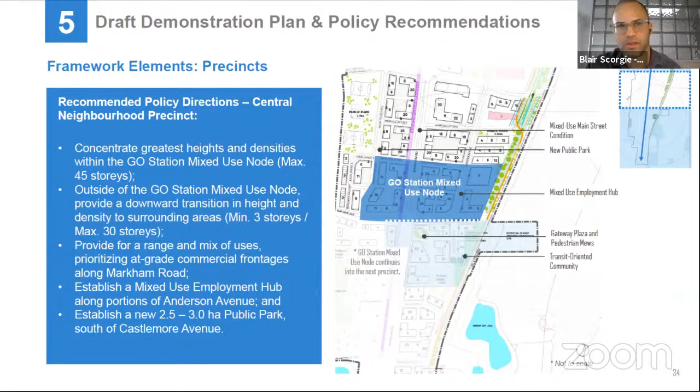Finally, the South Precinct is anticipated to include this fine-grained retail environment, inclusive of community-based retail uses that currently serve existing residents and site visitors, which help establish a transition to the Markham Village area to the south from the more densely developed lands around the Mount Joy GO Station to the north.

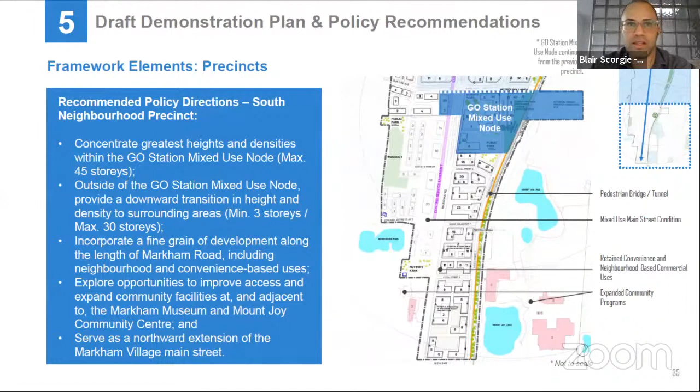A pedestrian bridge or tunnel will connect the secondary plan area to Mount Joy Community Center and Park to the east, which is a major parkland and open space, and community services and facilities asset in close proximity. Again, the siting of the bridge or tunnel will be subject to further study.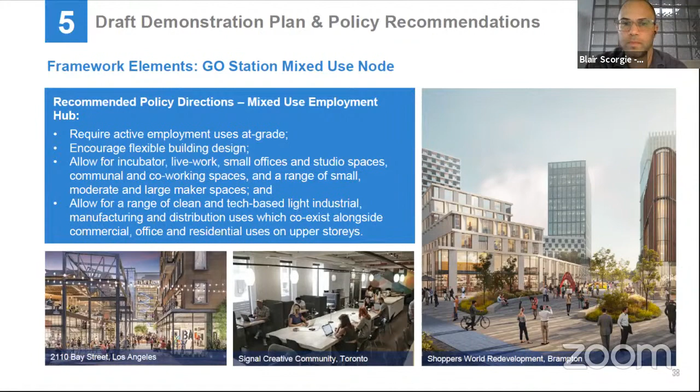So again, we're curious to know—this is what we've heard to date. We'd like to know, did we get it right? Or is anything missing? Are there any considerations needed as we proceed through the next stage of the study? With that, I will hand it back over to Shonda, who's going to lead us through a poll and discussion.

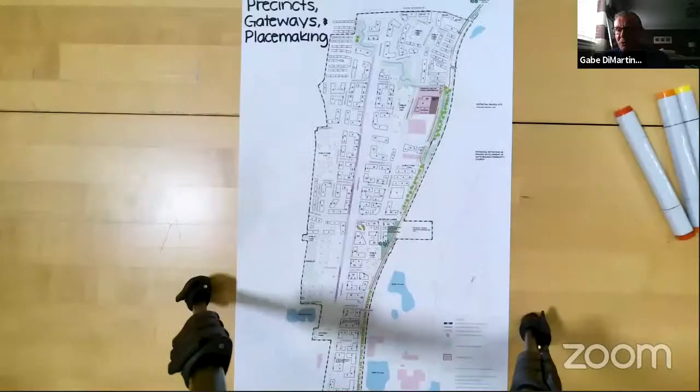Shonda, I agree with you, east-west gateways are important as well. With the Edward Jeffreys connection and the potential tunnel or bridge linking to Mount Joy Park, we feel that would be an opportunity to consider a gateway location, not only for the Mount Joy community on either side of Markham Road, but also for the community to the west of Markham Road. Especially at the intersection of the two new minor collector roads with the Edward Jeffreys extension and the proposed north-south road, which north of Edward Jeffreys is proposed to be a minor collector as well, we feel it would be a good location for a gateway.

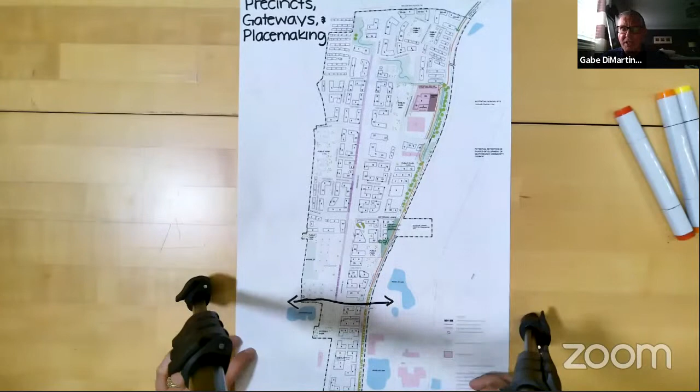On the issue of schools, I'm wondering, in a context like this where it's going to be more urban with typical school sizes, have any discussions been had with either board about whether they would consider an urban school at the base of a condo in a podium? And I'll stop there.

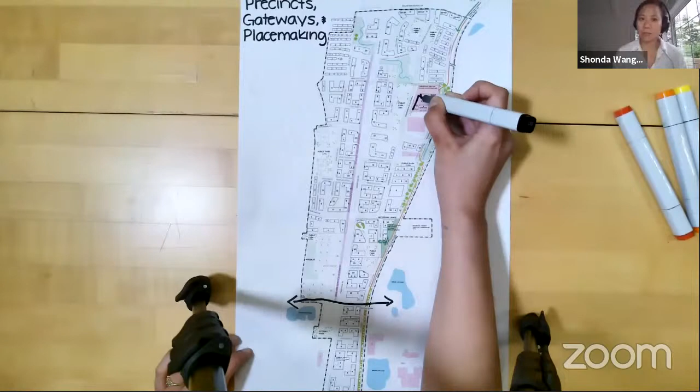Thank you, that's an excellent question, Gabe. That's something we're always interested in, to figure out how we can most efficiently use our land. We've had some initial conversations, but as part of the circulation on this interim report and draft demonstration plan, it has gone out to the school boards. We want to see what their thinking is, because this draft demonstration plan shows a pretty robust integrated type of development with both residential and mixed use on top of the school. It'll be interesting to see what the feedback is on that.

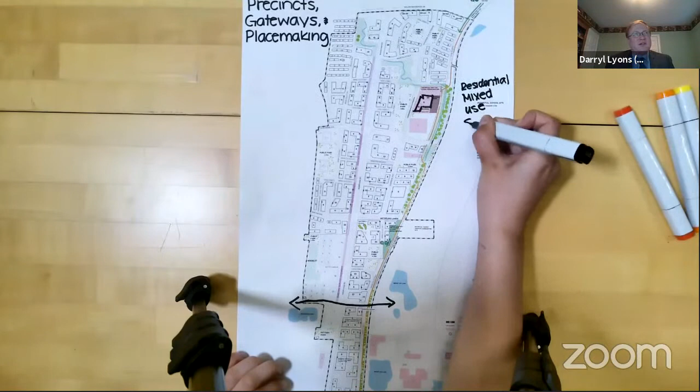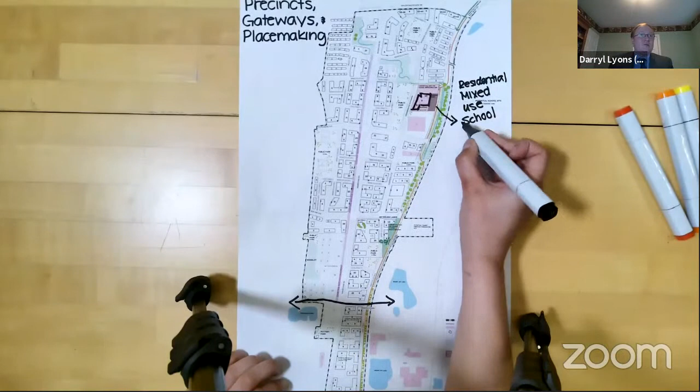The other thing we're trying to think about, based on our further analysis of the population yields within this draft plan area, is whether we're going to actually need to accommodate another school site. There's a formulaic approach to looking at what the population would be to determine whether we need another site, so that's part of the conversation as well, depending on how the numbers continue to refine.

Daryl, is that school identified as an elementary level, or is there a possibility of a secondary school? Currently it's identified for elementary. There are other schools, including secondary, just east of this site, so it hasn't been identified for secondary. But as I said, it's out for circulation with the school board, so we'll get a better sense from them as they look at it and figure out their projections and needs. Great, thank you.

I see Rosemary Humphreys. Hey again, Daryl.

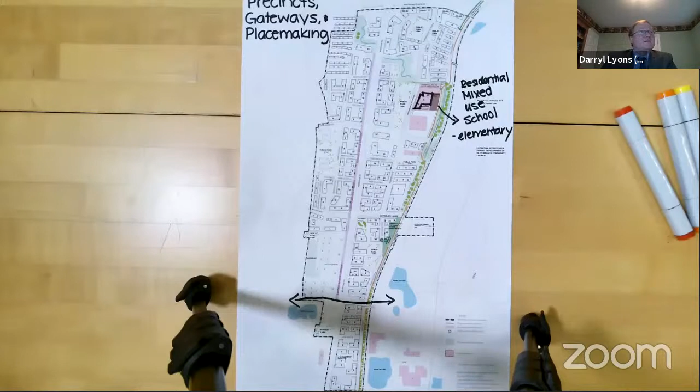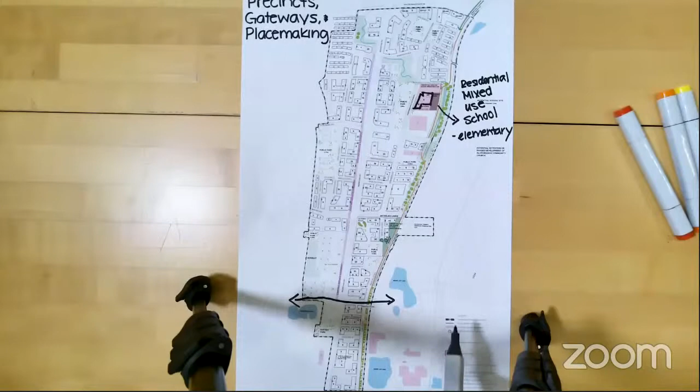Yes, we would prefer the consulting team to consider spreading out the community land uses on the Krashnik property so they're not faced with having a school, a park, a multi-use trail, and an open water course channel all located within their own property. I actually believe their property has been inundated with community land uses on an unnecessary basis, and I would ask that the team consider relocating some of these uses to other properties within the study area.

Okay, thank you, Rosemary. And of course, we can have further conversations about this as we go. I always look forward to meeting with you and chatting. Thank you.

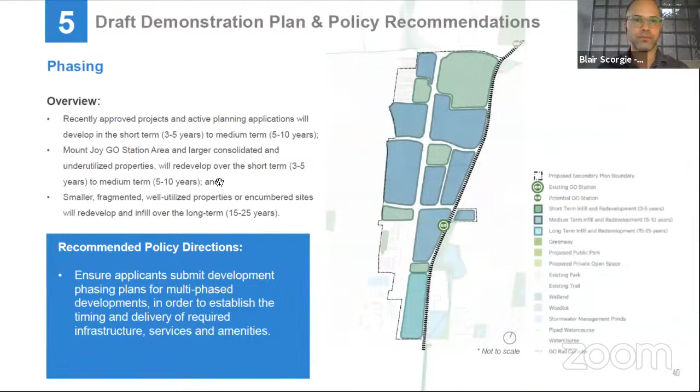The interim report outlines some key tools which may be used to implement the secondary plan, and Daryl highlighted some of these earlier. Specifically, direction is being provided with respect to the coordination of development, existing lawful uses on land, conveyance of lands, landowner agreements, development phasing plans, zoning, future studies, and other considerations.

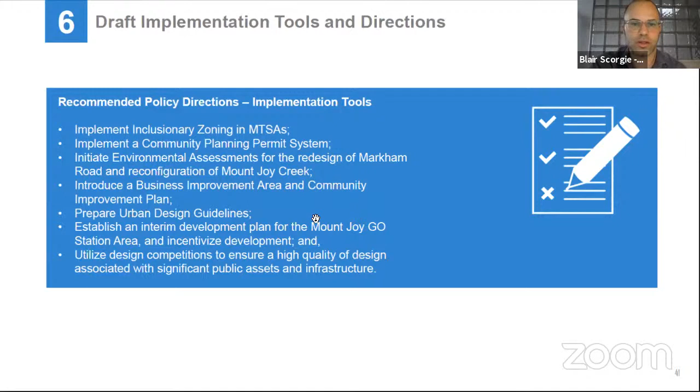For ease of reference, here's a quick list of the types of tools we're considering: inclusionary zoning, community planning permit system, environmental assessments for Markham Road, business improvement area and community improvement plan, urban design guidelines, interim development plans for the Mount Joy GO Station area, and design competitions. We're also looking at the timing and sequencing of capital infrastructure projects, as well as the coordination necessary with key stakeholders with respect to transit-oriented development potential around station sites, the viability of the Major Mackenzie GO Station, and the Donald Cousins Parkway extension specifically.

So with that, I will hand it back over to Daryl, who's going to make some concluding remarks.